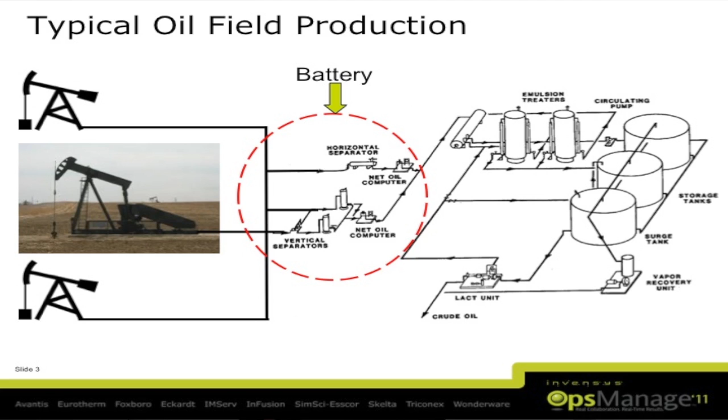this battery here. And then that's typically where you use separators, traditional flow metering technology of separators, where you will separate the oil, the water, and the gas, and then be able to measure the flow rate of the important hydrocarbon, typically in this case oil, and in some cases gas.

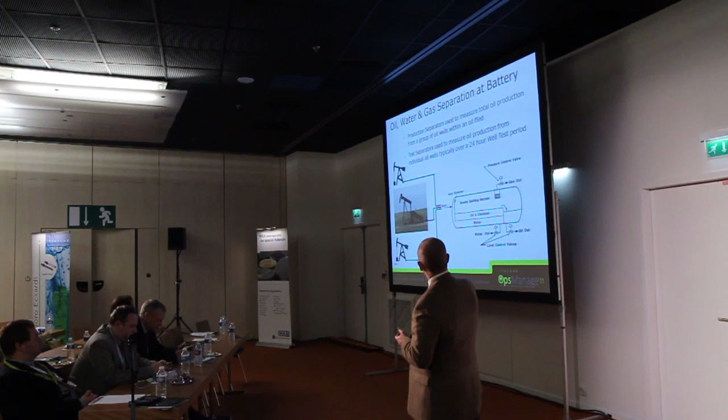So again, to elaborate a little bit further, now we're talking about separators. And there are two types of separators that are typically known in the oil field. One is a production separator, and a production separator usually measures the oil, water, and gas flow rate of all the wells in a particular field, or a well pad. You may have 15, 20 wells, and they'll be all manifolded together. All these pipes will lead into a very large production separator.

And the production separator has baffles, and typically, unless it's very, very heavy oil, with your medium to lightweight oils, the water density is higher than that of the oil, so the oil rises above the water, and then with the set of baffles, the oil will spill over the top, and then you have these drain pipes with valves and level devices and a bunch of mechanical claptrap, as we call it, to meter, whether it's a turbine meter or a PD meter or perhaps a Coriolis meter, the water flow, the oil flow, and then the gas flow off the top of the separator.

And also what is typically used in North America, not so much in other parts of the world, excuse me, wrong button there, are test separators. And a test separator is really just a smaller version of a very large production separator, where you typically use the test separator to monitor an individual well, one well's production over a 24-hour period.

That's routinely done here in North America, and a lot of countries around the world are getting more and more interested in understanding what type of production is coming off of an individual well, even though perhaps a state-owned entity might own all the wells. Now they're trying to do reservoir management, reservoir optimization. So this is the type of equipment that's out there today.

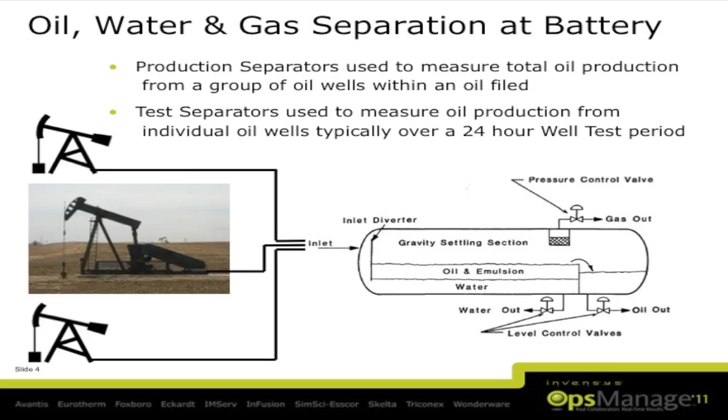And I've heard numbers in the range of, for North America, $300,000 to maybe as much as $500,000 to install a test separator on the pad at a well site, add all the tankage, the turbine meters, the level devices to know when to open the valve to flow, if you will, to storage tanks or piping. So that's the typical type of equipment that's used out there today, and lo and behold, what do we have? Now this is really exciting stuff.

This is an innovative advanced application solution that we've put together here, and as you can see, excuse me, I keep using the wrong button here. As you can see, it's an integrated solution, and the neat thing that you can realize from this is that the flow comes into the piping and out the other side of the piping with a bunch of instrumentation, which I'll talk about. But no separation. There's no separation. This is, as we say in the industry, the commingled flow regime of the oil, the water, and the gas at whatever ratios it happens to be flowing at the time.

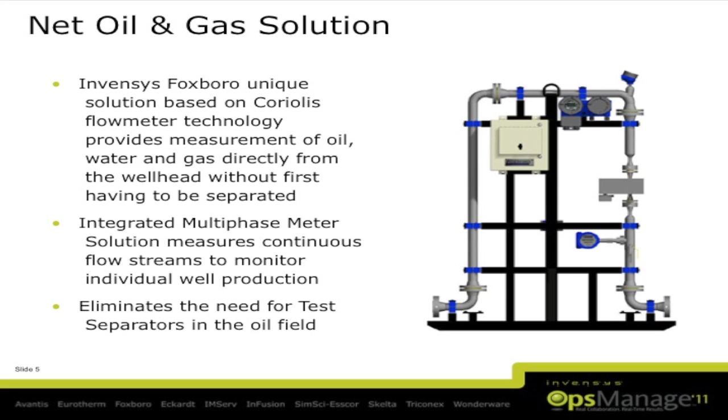The continuous flow stream we're measuring on the fly, or as my UK friend likes to say, in situ. We're measuring the oil, the water, and the gas content, the gas up to a particular level, which I'll cover, in situ. And it is really an integrated multi-phase meter solution that measures the continuous streams for an individual well production, and it eliminates the need for test separators.

So let's talk a little bit more about some of the benefits. And this is really the sales slide for your sales folks to get your customer on the hook on all the good things about it. In addition to being lower cost, capital expenses, and operational expenses, it really gives them real-time information to monitor the reservoir, whether it's a water flood type of reservoir to push the oil out of the ground, or a steam reservoir, or CO2 gas reservoir, whatever the lift mechanism is to push the oil out of the ground,

out of the reservoir. The information is typically stale, days or weeks old, when it finally makes it to the folks that are managing the whole field, the whole reservoir. So this can give you real-time information and extend the life of the existing wells.

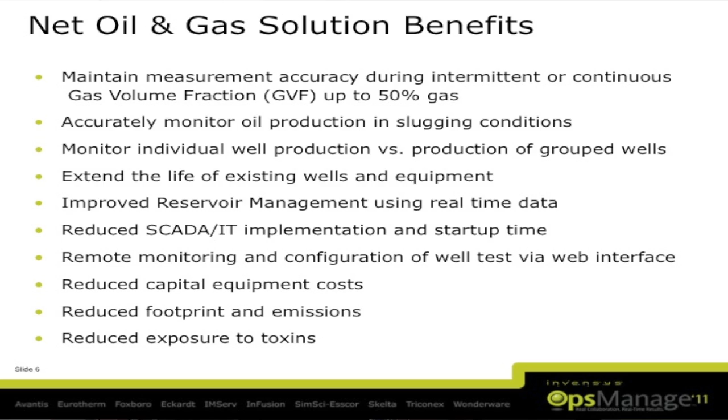What we're finding in many parts of the world, especially in Russia, is that they have grouped well production, but they're really not sure what's coming out of each individual well, and they want to start to look at individual well production and how that affects reservoir management. And perhaps with the price of oil going up, some wells that are capped start flowing and they do these types of well tests to see if it's worth, based on the price of oil, running wells that maybe had lower production in the past. So you can read all those bullets, but that's the sales pitch and all the benefits here.

So now we get into the meat and potatoes of what it is. If you'll bear with me here, I'll just give you a quick overview. In this scenario, this is the inlet side and this is the outlet side. So the flow comes in, and this is our patented Coriolis flow tube, and this is our new CFT51 transmitter. As you can see, a Coriolis flow meter. This is a water cut meter, a third-party supplied water cut meter with this particular specialized version that is manufactured for Invensys for us.

And this water cut meter is near infrared optical technology, and it has the ability to measure, through near infrared light spectrums, the percentage of water in a water and hydrocarbon stream. There's a calibration that you do when you set it up with a given oil and water, but it is a very, very reliable device. And then this is what we call the net oil computer.

And we also use a temperature sensor as a reference for gas flow calculations. We need to know the actual temperature and line pressure. And you see a multivariable transmitter here as well, where we're measuring the DP across the flow tube, so we know the static line pressure and the differential pressure across the flow tube, as well as the temperature input from the temperature sensor that goes into the multivariable. So those are the piece parts, the components that go into what we call the net oil and gas solution. And you can see that it's all self-contained in one integrated skid.

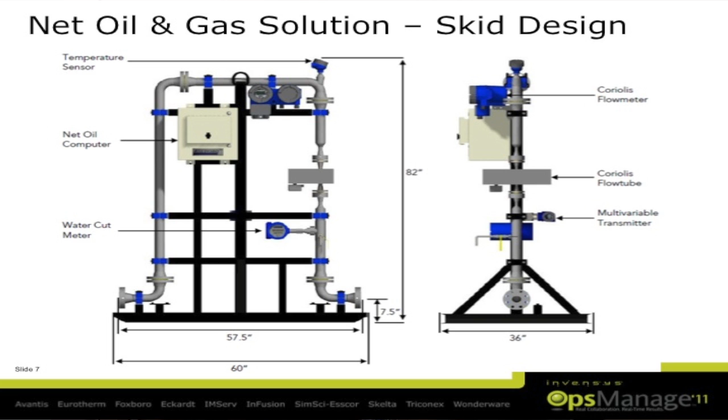The neat thing that Invensys is doing with these solutions is it is a fully Invensys-supported, delivered solution. We include startup, training, field service, and warranty support. We've built that model here in North America, and now I'm working with the Euro team to deploy that same business model, where it is a fully Invensys-supported, integrated solution. Whereas I know one particular other manufacturer that sells a Coriolis meter, and they also have a net oil computer, but they rely on their reps and distributors to put it together and support it. But this is really supported by a major such as Invensys.

And then in the net oil computer, we have these very advanced models that we've developed over the years with our Oxford team that has done tremendous amounts of research and development for us on our Coriolis meter over the years, working with Wade. From that, we're able to measure the net oil, hence net oil, the net oil in the oil, water, and gas stream, flow rate, mass flow rate, and volumetric flow rate.

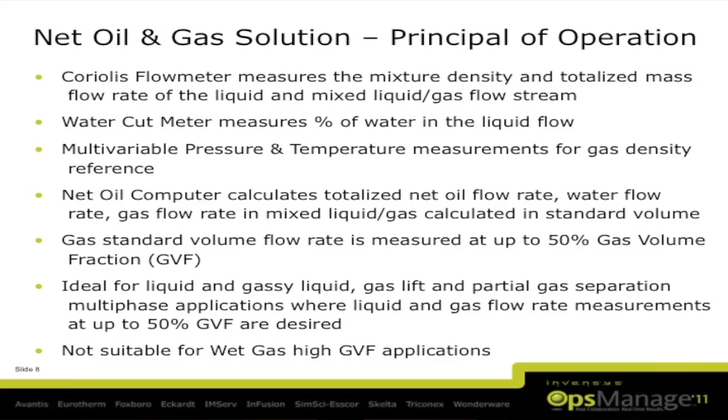You may have heard the term wet gas, and this is not suitable for wet gas applications. Technically, a wet gas application is 95% gas volume fraction, minimum. So essentially what you're saying is 95% of the flow stream is gas, and 5% or less is liquid condensate made up of oil and water typically. So that's why we call this the net oil and gas solution.

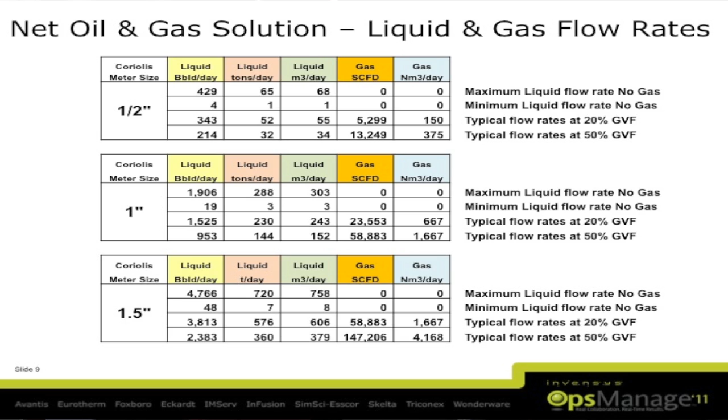I have two slides here, and really this is just kind of for reference for you. We have 5 Coriolis meter sizes from 1/2 inch to 3 inch, and really we're optimizing the net oil and gas solution around each flow tube size because in a nutshell, one model does not fit all Coriolis meters. The characteristics of the Coriolis meters and the flow regimes and the advanced models that are developed to be able to measure net oil and gas are not the same, unfortunately.

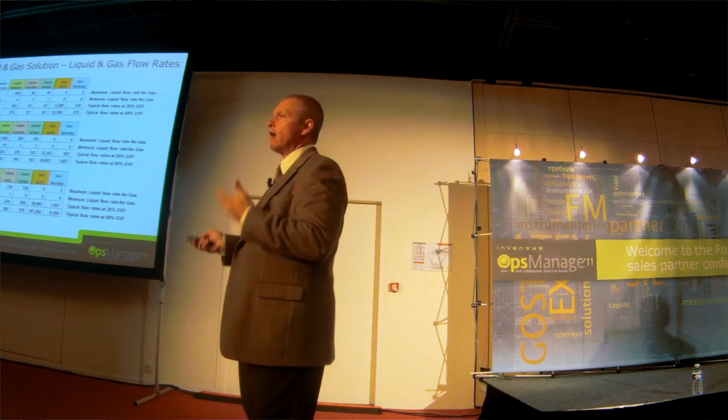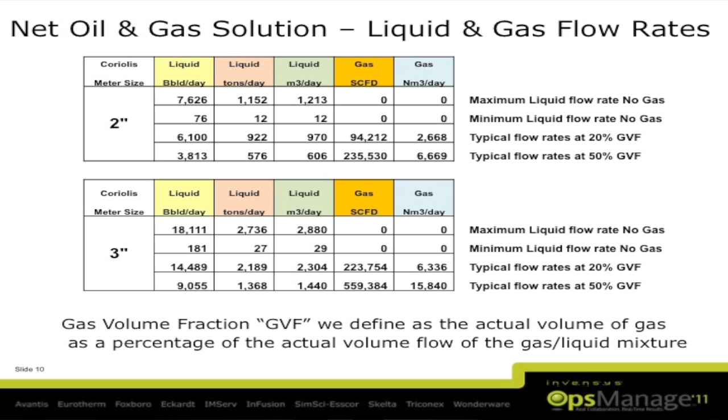So we have 5 different size meters, as you can see, and these are typical flow rates for each meter size of no gas, maximum liquid, minimum liquid, and then with 20% gas or 50% gas. And again, these are all in my data sheet that I've recently developed to help market and promote the solution. And as I said, gas volume fraction, we define it as the actual volume of gas as a percentage of the actual volume of flow of gas and liquid mixture flowing at any given moment.

Okay, so from a sizing standpoint, hopefully these tables and the process parameters and the operating ranges that I've provided in the data sheet recently will help you to perhaps find particular applications that this might be suited for. But there are a lot of key questions that you need to ask for those of you who are working in upstream oil and gas. And these are a bunch of them.

What type of measurements are they looking for? Are they looking for just the oil? Do they want to measure the water and gas? What type of lift is it? Water or gas lift, perhaps? Single or group wells, range of flow rates, range of line pressures, maximum pressures, range of water cut, range of GVF. What are the densities? Right now we can only handle up to a medium to just barely into the low medium weight range, up to a density of about 870 kilograms per meter cubed.

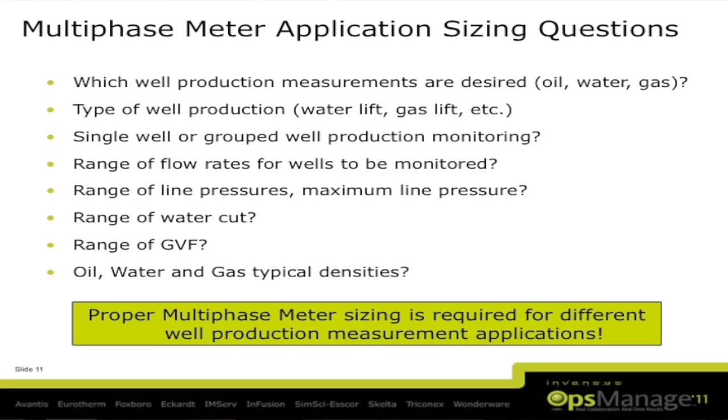So these are the types of questions that a TSC or your technical support folks would give you in vetting an application to see if it's suitable to what we have to offer at this time. And the important thing is, for those of you who aren't familiar, proper meter sizing is required because one size does not fit all, and flow rates can vary from well to well on a given pad, obviously.

All right, so to give you an idea of where we're at, I just got a few more slides here. Highlighted in the red yellow here are the initial specs that we've actually measured in an independent multi-phase lab, which I'll get to on the next slide. And highlighted in green are the specs that we're trying to achieve. So you can see right now that we know we have very good performance, and we're attempting to improve that.

And my Oxford team is developing new models and running additional multi-phase test trials. And we're about to go back with our 2-inch meter to the multi-phase lab in the UK, upcoming in December. And we're hoping, with improved models, to achieve these tighter specs. And for those of you who may not be working in the Russian market, the tighter specs actually meet the GOST standard: 5% error on gas flow, 6 or 15% on net oil, depending on the level of water cut, and 2.5% on total liquid.

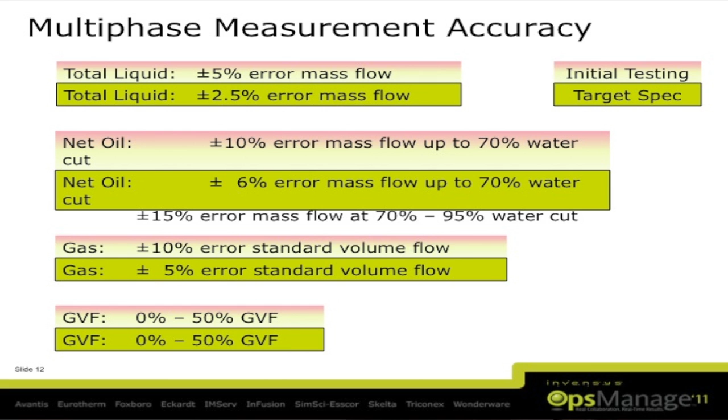So from what we've seen, these are the tightest specs in the world right now for essentially custody transfer of oil and gas, and actually measuring the water as well. So these are very difficult specs where we're attempting to meet these specs. This is a requirement in Russia for 2012. It's actually mandated that they'll have to measure these constituents off of every well and to these accuracy specs.

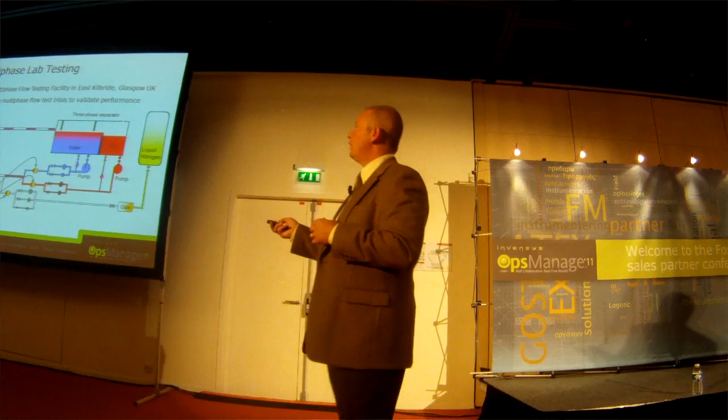So in that regard, I'd like to explain and really boast, if you will, on the due diligence and the effort that Invensys is going to at this point, and the hundreds of thousands of dollars we're spending to validate the performance independently of the net oil and gas solution. So what you see here, this is a diagram.

Keep pressing the wrong button, Rich.

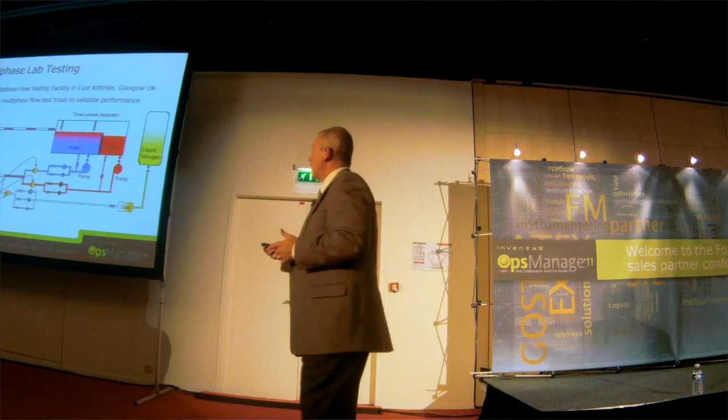This is a diagram, and this shows a multi-phase test lab facility in the UK. We refer to it as NEL. It's NEL TUV test lab in Scotland, near Glasgow. And this is the setup that they have. It's essentially a separator, as you saw, where you have a commingled string of oil, water, and gas.

They separate the water out, the oil out, and we do gas injection at various levels, and we commingle the three streams. And then this is our skid, in schematic diagram. It would actually be standing upright. And what we're able to do is we have reference meters, single-phase reference meters. We happen to know of a really good Coriolis meter, so we're using our own Coriolis meter with validated calibrations as reference meters.

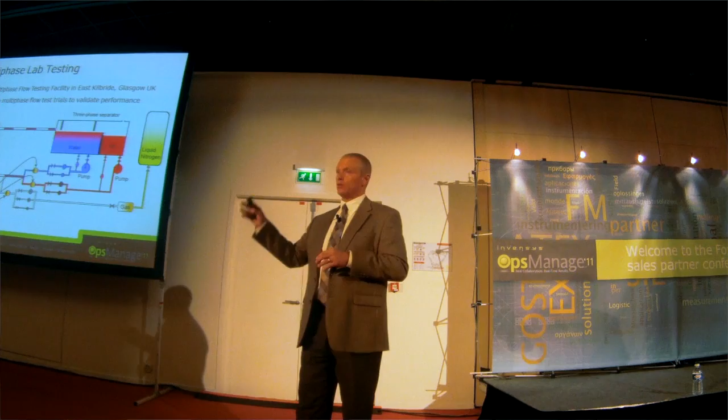We have a very extensive test matrix that we've been running at this NEL lab for months now. We're looking at various levels of water cut and various levels of gas void fraction in our ability to accurately measure net oil and gas. And I can tell you that those specs are the most stringent standards in the world, and we're right now very, very close to meeting them, and we hope that we'll be able to validate the performance with an independent published report that we can meet those specs.

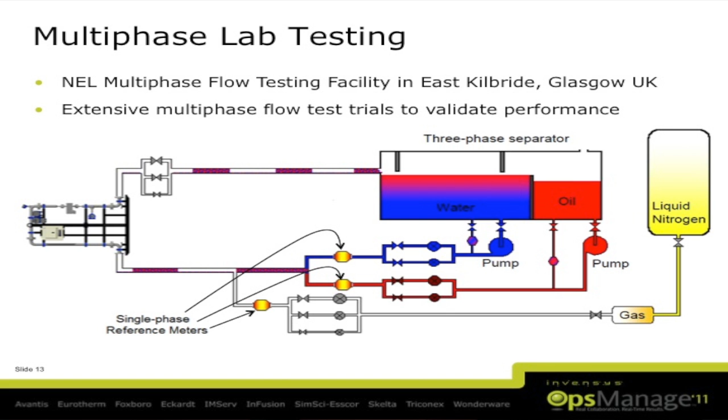And as soon as we're able to do that, my colleagues like Andrei Lepikin and Boris Muratov's team are going to be selling these things like hotcakes because, as we said, it is a requirement in Russia. And in terms of a field trial, I had hoped to have some results to report by this conference, but we're just not quite there yet. So our very close customer in Russia is preparing a field trial.

This is actually a heated enclosure that they use in Russia because obviously it gets very, very cold in the wintertime. And this is where the equipment is installed. So right now they're looking at fitting the net oil skid, or I should say shoehorning it, into this enclosure. They're going to be running a trial in the November-December timeframe, and they're hoping to finish up by the end of December.

And inside this enclosure is a competitor Coriolis meter that has the luxury of separation, where the gas is being measured separately and the oil is being measured separately. So we're going to do an in situ field trial to prove to the customer and ourselves that it's as good as we say it is. And this happens to be a handsome gentleman here, Alexander Lishuk, who was formerly with our customer and is now working on a consulting basis with us, helping us to make inroads.

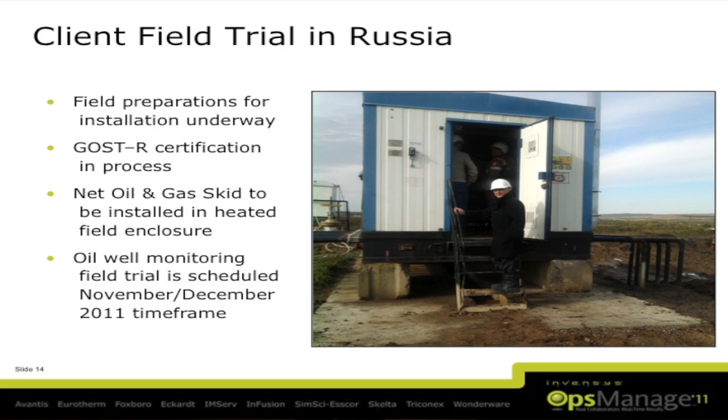So we're really hopeful that we're going to get great results and have validated independent multi-phase lab performance. I've looked at the competitor data sheets, and I don't see anybody looking to specify measurement accuracy performance on the three phases like the specs we're shooting for. So it's pretty exciting stuff. We wish we could do it more quickly, but contracting and buying time at these multi-phase labs is very expensive and time-consuming, and we don't have endless resources, unfortunately.

So it's taking us some time, but we hope that this coming fiscal year is going to be really great for us, because we hope to have an offering of the net oil and gas skid solution in the 1/2 inch, the 1 inch, and the 2 inch meter that will have gone through independent multi-phase lab testing, with an independent report with validated performance.

So I think I went through that just about on time. It's 4:15. 10 minutes? Okay, I'll sing. No. Oh, well, that's because we started late. As we started late, I was trying to get us back on track. Plus, I'm from New England and I talk fast, so.